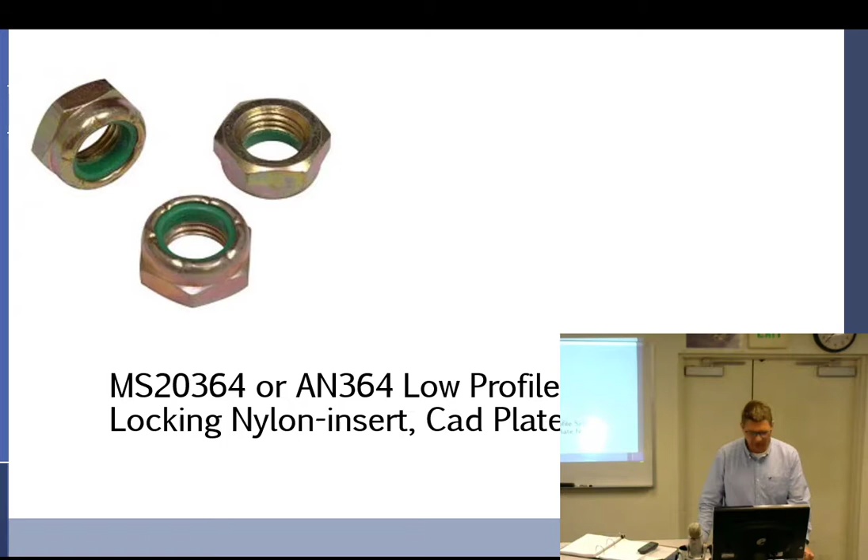Oops, can't see that because my writing is underneath the picture. Got to fix this stuff. All right. Oops. We want that one. Okay. So where did I leave off? Here, we'll do this one.

Okay, so point number 2, MS 20364 and an AN 364 or an NAS 1022 is tension load. No. Shear load, sorry.

Just making sure somebody is paying attention. I want the hard eraser. Why can't this be there? Technical difficulties on this side of the class. Yeah, that's what's throwing me off over there. You guys are all jack wagons.

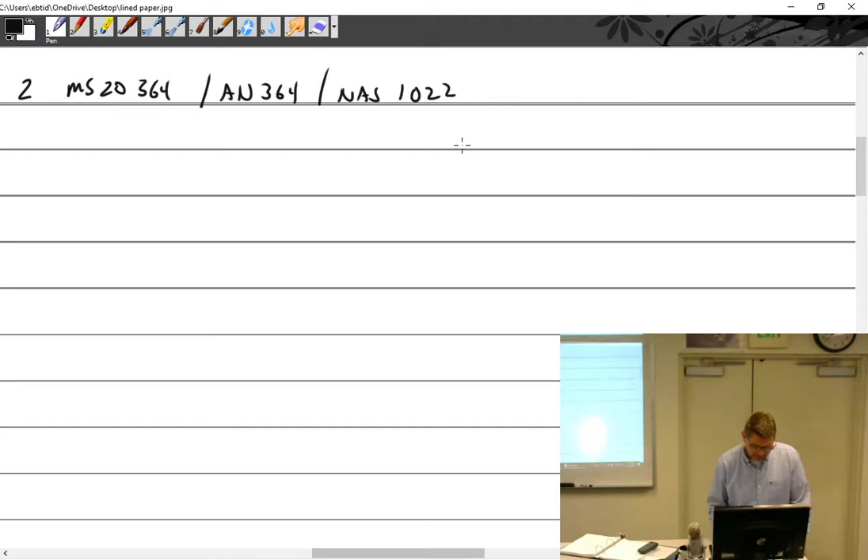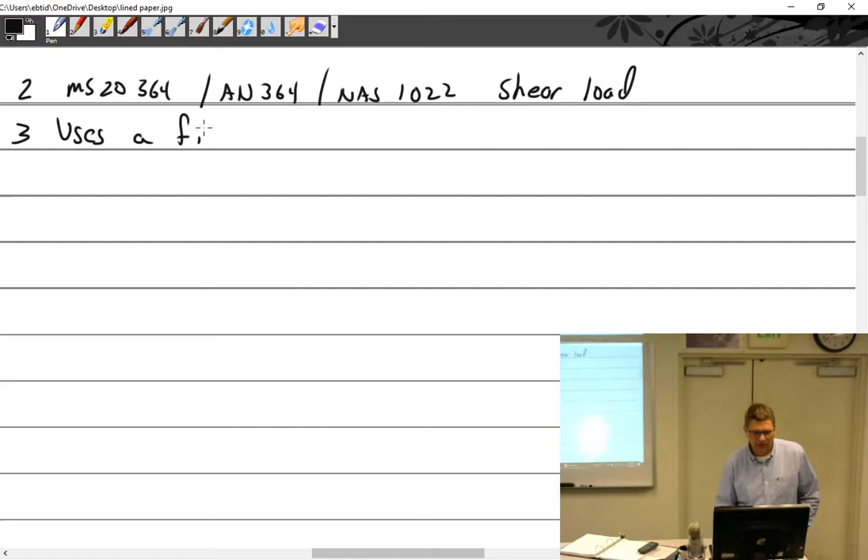All right, is shear load. Shear load. All right, all of them. The 364, 365 uses a fiber or nylon insert that grabs. It's an unthreaded insert. Grabs the bolt. So the nut grabs the bolt and prevents it from turning.

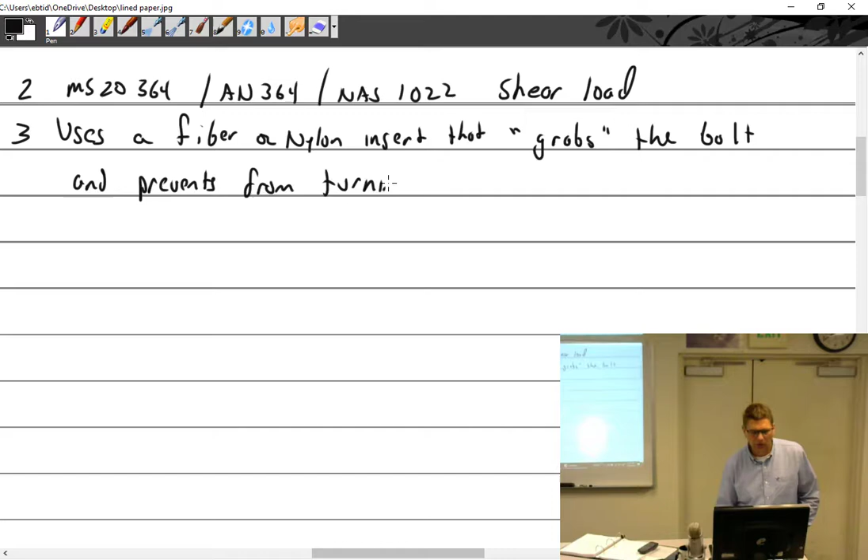Is it reusable? Yes. Possibly. Reusable if the nut has a minimum prevailing torque or application torque, and that torque is found in AC 43.13, chapter 7, page 7-12.

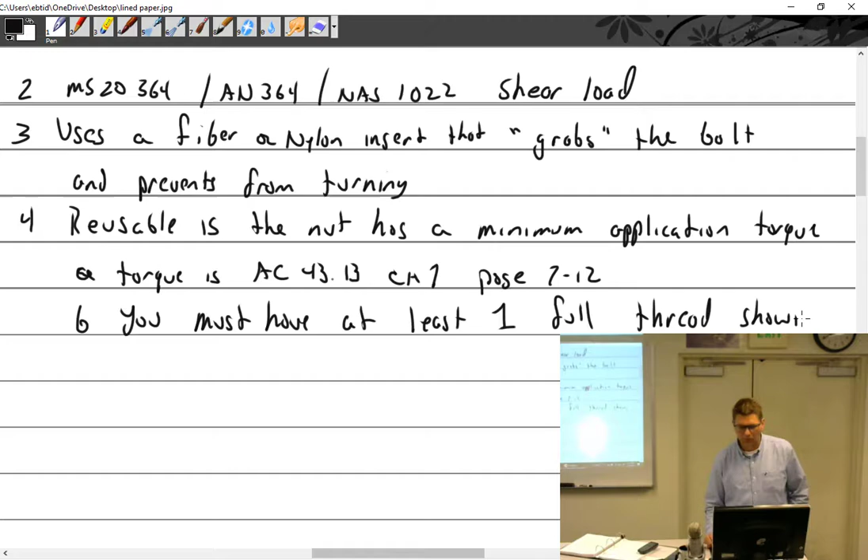Also, this has nothing to do with being reusable, so I don't know why it's here, but anyway, you must have at least one full thread showing past the nylon.

What if you put it all together, torque it down, and it's flush with the nylon? So what do you got to do? Take it off. And what? Use a longer bolt. Use a longer bolt. Or change the washer. You could go to a light washer. Take from a thick to a thin washer.

Yeah. How would anyone know if you reused it? You would know. How would they know? Because if you took it off, it would. You can take it off. That's possible. So like if you had a couple in your hand, how could you tell which ones were being reused and which ones weren't? If you put one on that wasn't up to spec, how would anybody know? You wouldn't. Nobody would know. Yeah, it would look fine. I guess when it fell off, we'd know.

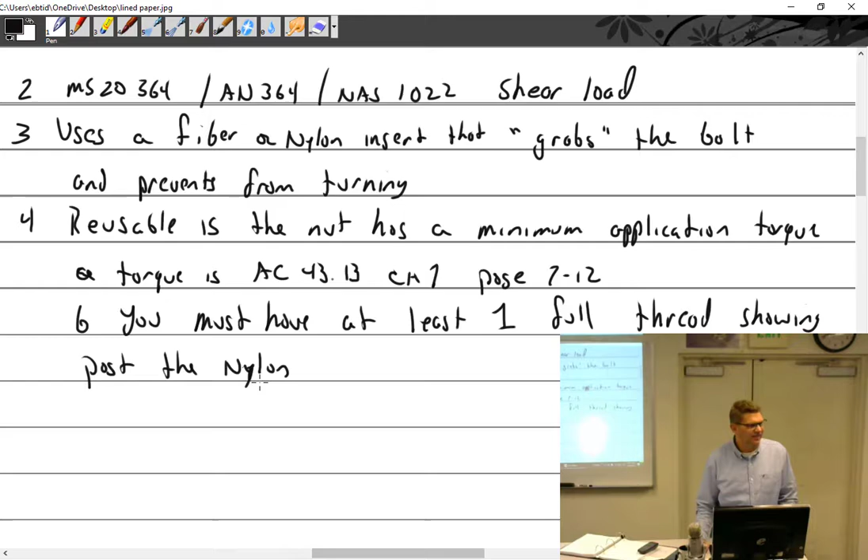But no, quite honestly. So if you take a nut off and you're like, I'm going to reuse the nut, and I really don't want to check prevailing torque, I don't want to deal with all that. It kind of doesn't really go on by my fingers, I need a wrench, or even if it screwed all the way down with my fingers, just torque it. It'll look fine. You would have no idea. Does that answer the question? You're shaking your head like, yeah, that's the way it is.

Now, would you personally ever use a self-locking nut like that? Yeah, sure. It's right there in AC 43.13, tells me I can.

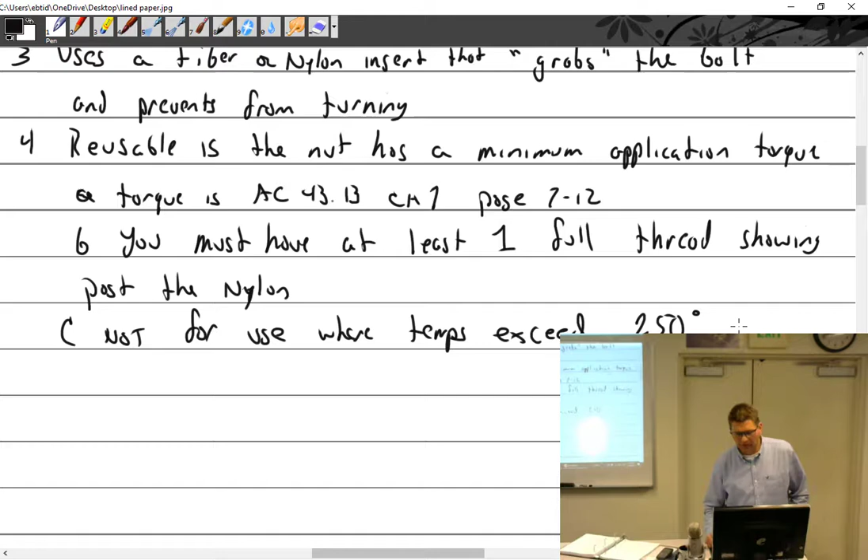Not for use where temps exceed how much? 250 degrees Fahrenheit. And I think I already mentioned this once, not for use where bolt or nut are subject to rotation. All right. What if we have to go over 250 degrees?

All right, so there's our prevailing torques. Here we go. So this is often called the high temp self-locking nut, but it's only good up to 450, not very high temp. So you're building an airplane, which is something I used to do a lot, take it all the way down, put it all back together, use new hardware. Where would I make the distinction between maybe doing this nut or one of these nuts? Location. I mean, what would be a good rule of thumb? Where would I use these nuts?

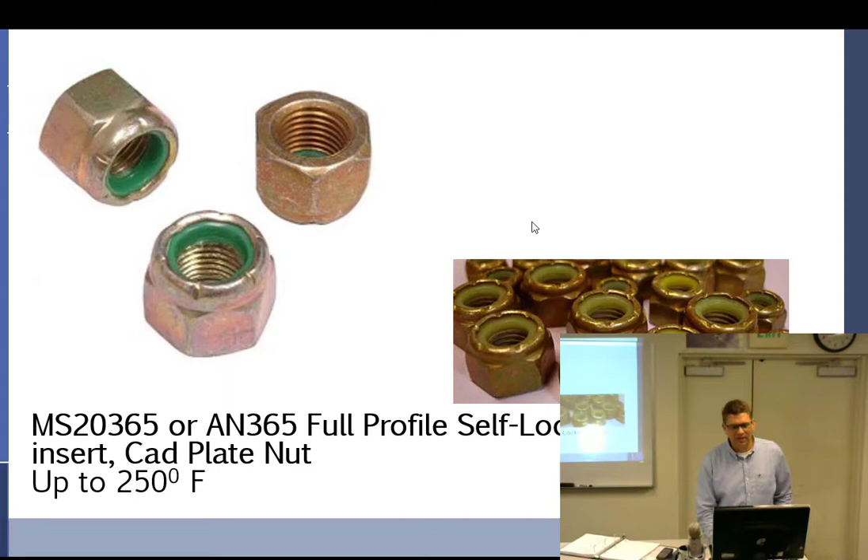The door. Okay, everything behind the firewall should be 250 degrees or less. Where would I use then the low temp, high temp? Forward of the firewall, not everything, forward of the firewall. That was kind of my rule of thumb. So I would use forward of the firewall all this type of nut. Not that everything forward of the firewall reaches that kind of temperature, but it just made good sense to me to do that. That's the MS21045, the AN363.

And along with that, should I have a small shear nut? Say no. Nope, they don't make them. So these just come in the tension, the taller, that I'm aware of. They make different kinds of nuts.

So the way this one works is you can see that they've cut it. Like a little monkey trained to use a hacksaw, he cuts slots in it, and then they put this part in a vise and squeeze it in. So this is actually smaller than what the bolt is. So as the bolt goes through it, it has to spread this part of the nut out, and that grips it really tight. Which also means that these nuts can be a little problematic getting on. They can be pretty tight.

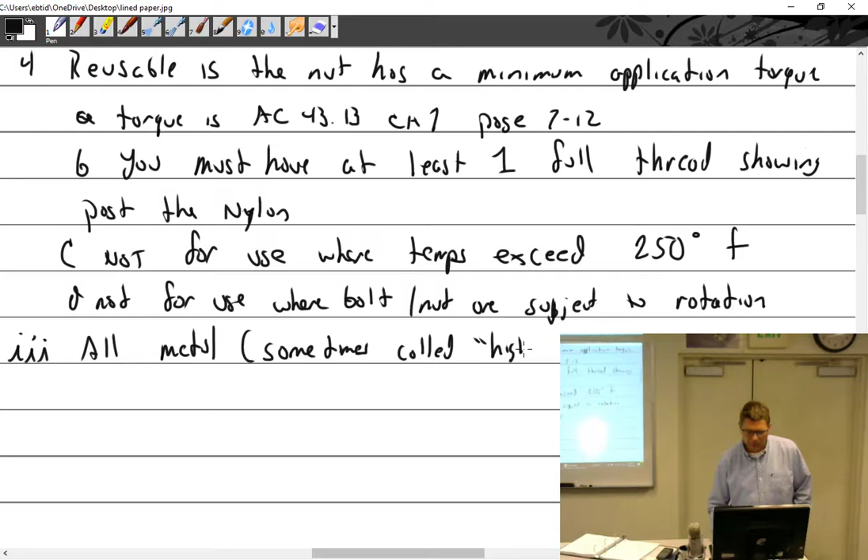I'm going to go minimum prevailing torque. We'll call it all metal. Sometimes called high temp. I got to go up a little bit, high temp. But it's not really high temp because max temp is 450. So could I use this on an exhaust? No. Definitely not. Although I see it done.

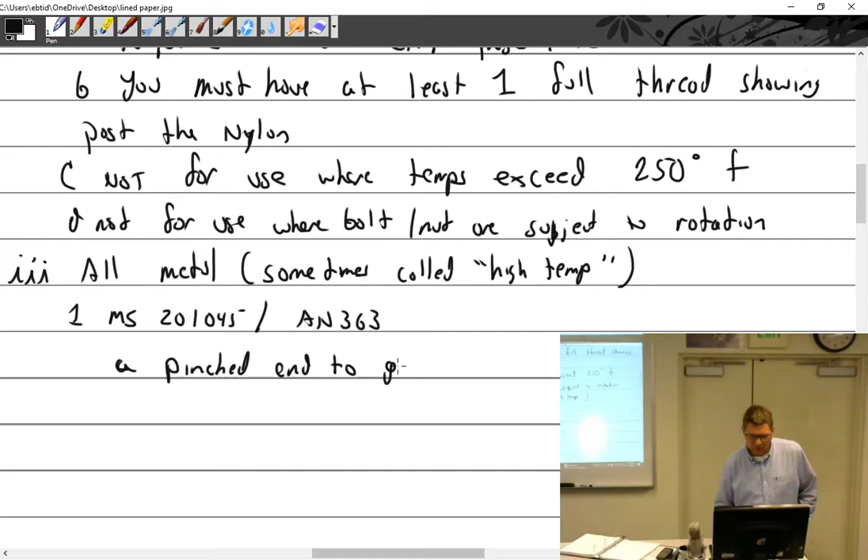All right, so we have the MS21045/AN363. We'll call that the pinched end. A pinched end to grip the bolt. Okay, then we have the MS21046. Again, I don't need you to memorize part numbers. It's just, what else am I going to call it? Uses an out of round end.

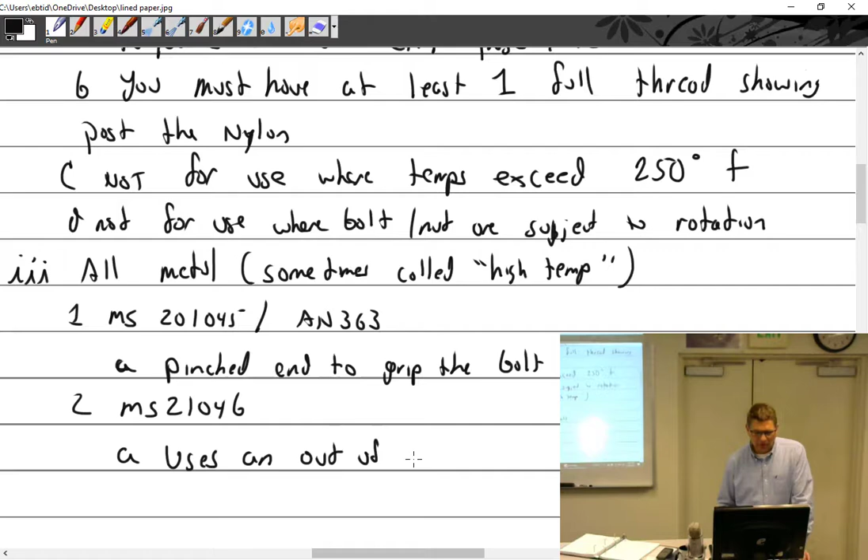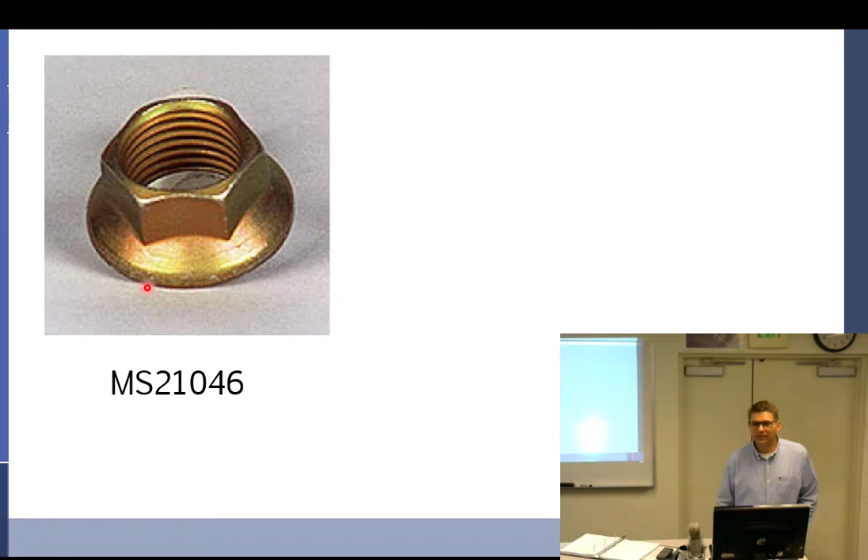There we go. 21046. Yep. So it's actually kind of pinched in here, but it's not quite round, so one side is a little bit smaller than the other. It also uses a reduced size wrench on here. So it's funny, it's a smaller wrench size, but a bigger footprint down here. Would you still call that like a shouldered nut? Yeah, that's not a bad name for it. I can call it shoulder nut.

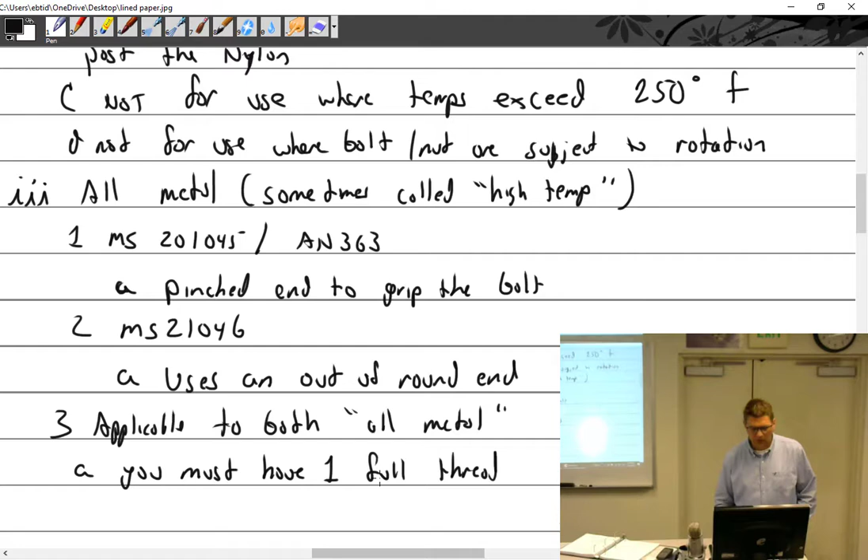Let me see. So, applicable to both nuts, all metal. What about them? You must have one thread showing. Full thread. What else? For use where temps do not exceed 450 degrees Fahrenheit. Well, why?

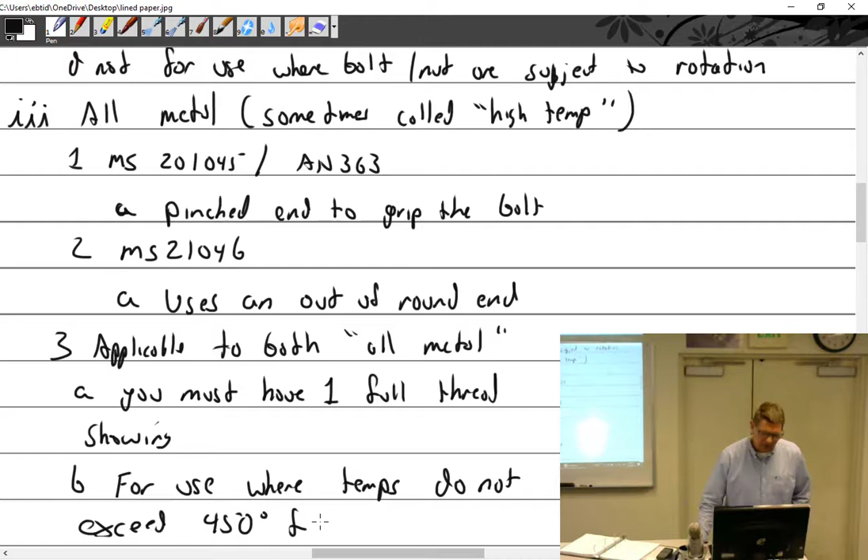Because it would expand and loosen? Ooh, that's good thinking right there. It's not right, but that was good thinking. No, I'm serious. That was good.

Okay. So often I'll see mechanics try and use these two nuts to hold exhausts onto cylinders where the temperature gets much higher than 450 degrees. And what happens is the CAD plating starts baking into the base metal and it becomes extremely brittle. To the point where I've often tried to take them off and the nut will crumble in my socket. It comes right off. Easy off.

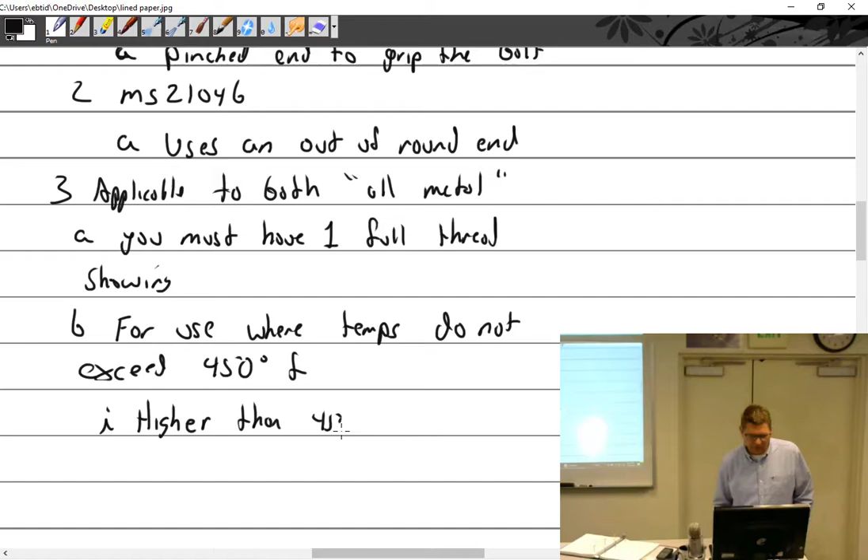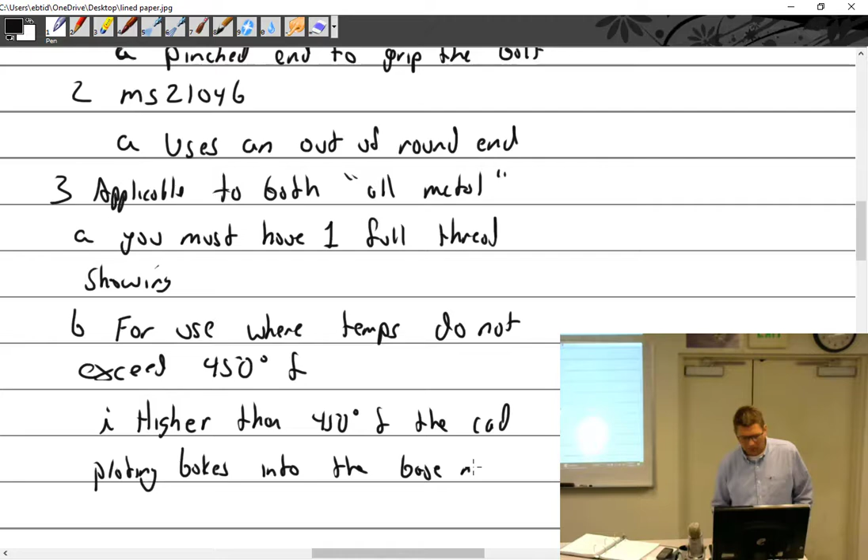Higher than 450 degrees, the CAD plating bakes into the base metal, and nut becomes brittle. It's like peanut brittle, but it's nut brittle. And not for use where subject to rotation.

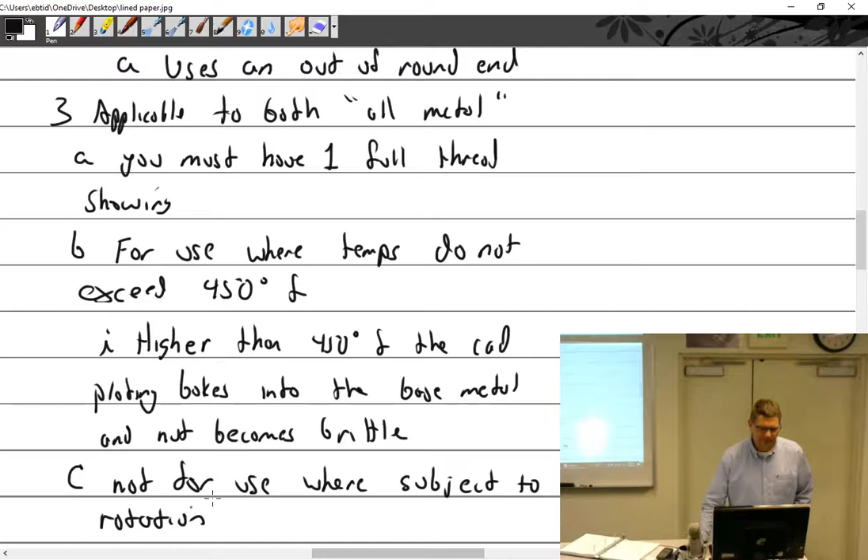How far can I go up here? I'll just keep going until somebody starts crying. Okay. All right there then.

Non-ferrous? Oh, not asking me. And let me see, do I have the... Now, Lycoming uses corrosion resistant stuff, lock washers and stuff, so that's what you get there. So high temp nut, I'll just put this: where temps exceed 450 degrees. We can just leave it at that.

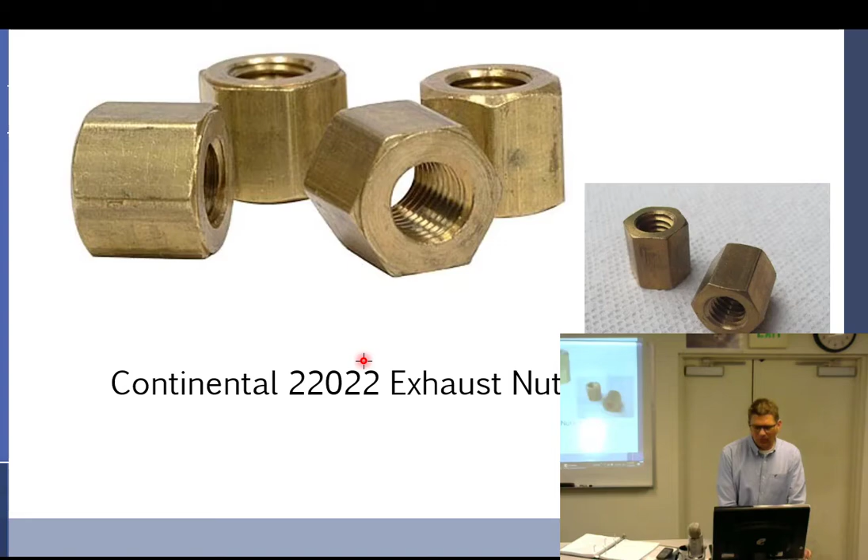C for castellated. Castellated nuts. Okay, an AN365 was the tall self-locking. Then the AN364 was the shorter one. And wouldn't it be nice if castellated nuts did the same thing? But no, the taller one is an AN310, and the shorter one is the AN320, backwards.

So if you look at that 320, there are not a lot of threads in there. There's about 1.5 down here. These things strip out super easy. So you have to use the low end torque, or you'll find out why. What's next? Oh, I remember that one. Okay, so when you use these, there are many ways to install a cotter pin. There's only two right ways.

Tim sent me a great picture today. It looked like they basically tied it in a knot on this side. Well, that's wonderful too. This is the preferred way, where it comes through, and you bring it over the top of the stud and then it's cut. So don't let it come over and down and around over here. And the other one is bent down around a flat of the nut. That is the proper way. The alternate way is to rotate this 90 degrees and bend each side around that way. It is acceptable.

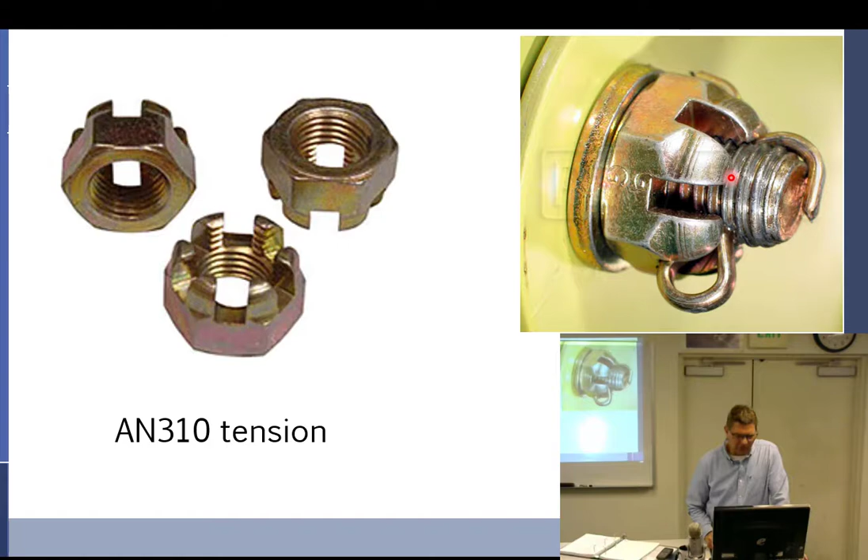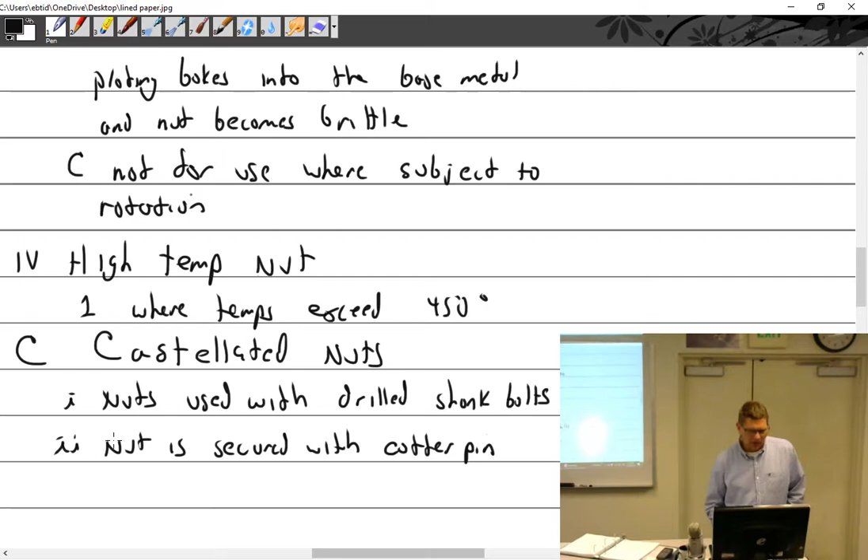All right, castellated nuts. What do I do? All right. Nuts used with drilled shank bolts. Nut is secured with cotter pin, sometimes safety wire.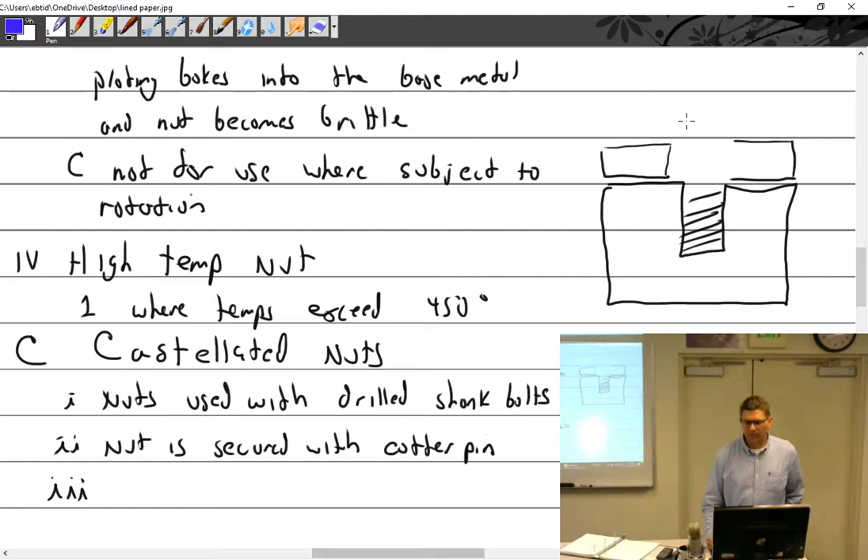All right, so if I have an item that I'm bolting something to, so there's one item, and here's the other item I'm bolting to the top of that one. And so this has threads. What kind of hole is that now? Blind hole, okay. And so the manufacturer decides they're going to put a stud in here. So here's my stud. Comes out. Got the threads on it. But they've drilled a hole. What goes here?

Okay. So first I'm going to add a washer. Then I'm going to put my castellated nut on. Oops, good luck here. Castellated nut. Good enough. There's my castellated nut. And I put a, what here? Cotter pin? Yeah. Put a cotter pin, and it comes in, it folds around one way or another. Bad drawing, whatever. All right, am I good? Got a castellated nut, got a cotter pin. What's going to stop the shank from coming out?

Right. So I take a wrench, and I put it on this nut, and I back it out. What do I end up pulling out? So now what do I have? Basically just a bolt that was never safetied to begin with. Everybody follow? You cannot use a cotter pin in this situation because the entire thing just comes out. And so what you end up with is a stud in your hand, a stud and a washer and a castellated nut, and there's my cotter pin. Now, the nice thing is you don't have to change the cotter pin. You just put it right back in, right?

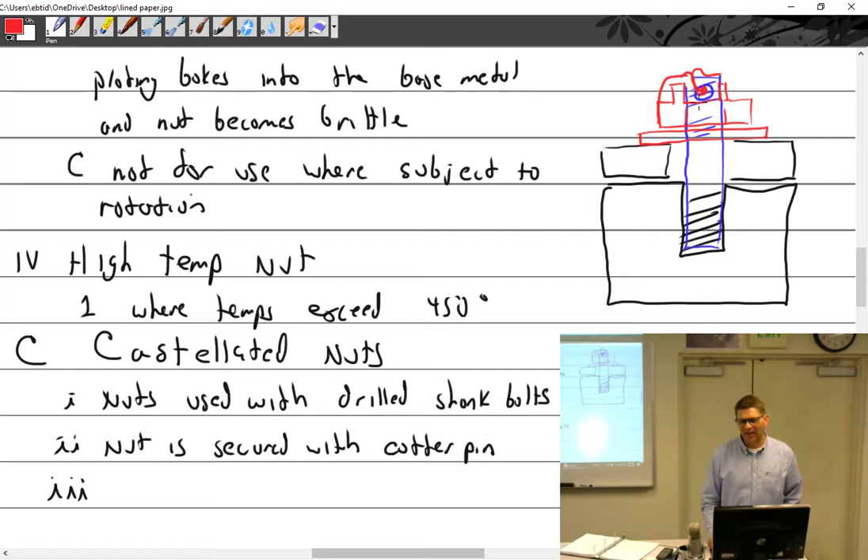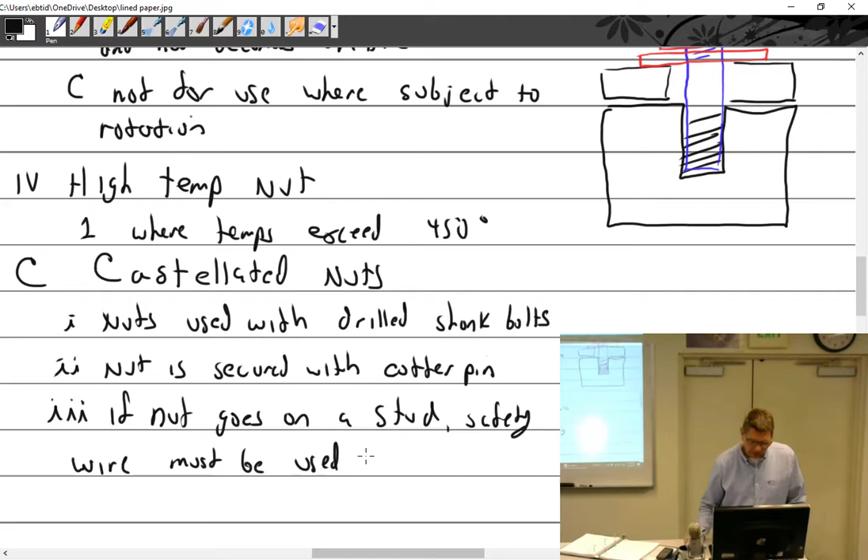Okay, so this does not work. You cannot put a cotter pin here. You must use safety wire. So that holds the stud in. Or cross-thread it. So if a nut goes on a stud, this is called a stud here, not a bolt, a stud, safety wire must be used. Otherwise, you just made a bolt, is all you made, with a removable head.

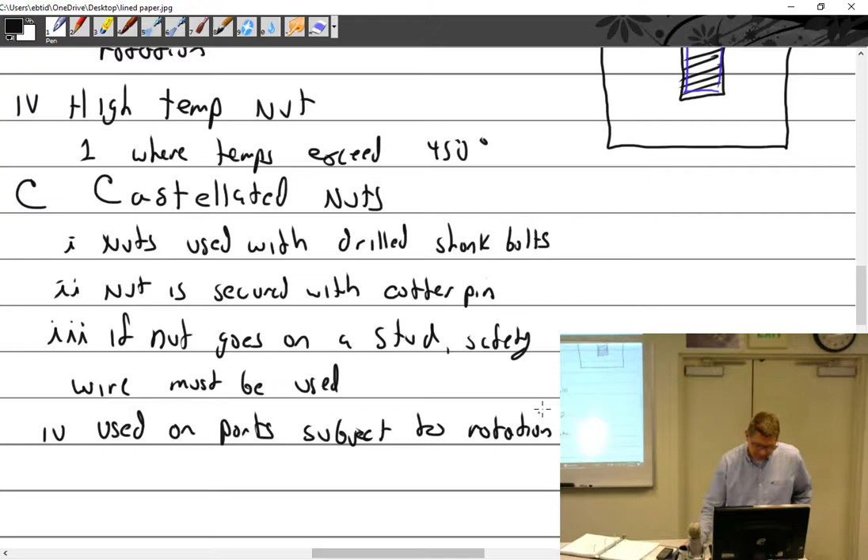Where would I use a castellated nut versus a self-locking? There you go. So I'm going to use it on parts subject to rotation, such as, not the wheel halves, but the actual wheel holding onto the axle has one big nut, and it's always castellated and has a cotter pin going through there. If I have a conrod, no, a conrod's not really subject to rotation. Connecting rods had cotter pins, but all new engines don't. They found that was just a disaster.

So clevis bolts used in shear load. They often hold control cables onto something, so the control cable has to give a little bit of movement, or it goes through a bell crank, so you don't want to squish down the end of the control. I'm talking about aileron controls, elevator controls. You want movement between those things. So you put the pin in, you put the nut on, it's barely finger tight, and run the cotter pin through. So there are a lot of times you don't even torque these things.

Part subject to rotation. You guys are awful with the phones tonight, man. You are going to lose it when you get into Larry's class and have to write essays.

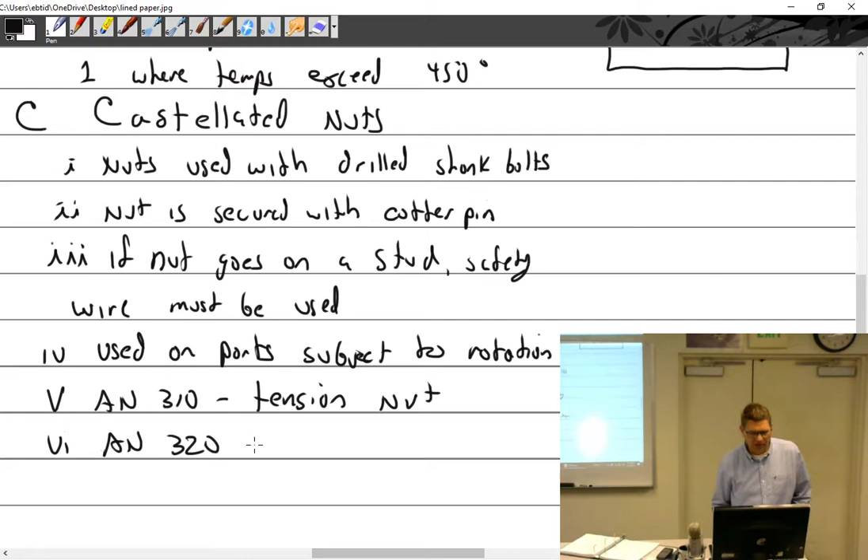So that's the tension nut, and the AN320 is the shear nut.

All right, that brings me to plain nuts, but not that kind of plain nut. Plain nuts. You guys are plain nuts.

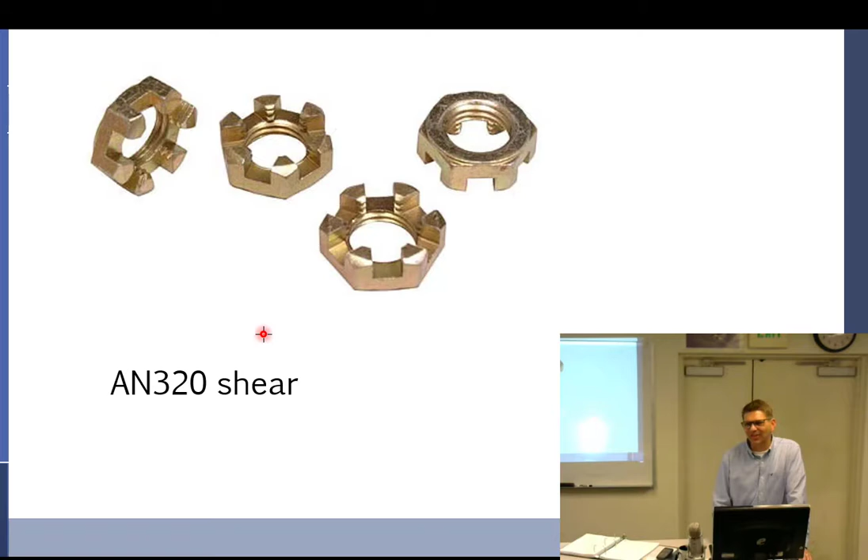Right. Oh, so I already saw that one, but I had a class one time, and the guy said, "Well, that's great. Why don't they make self-locking castellated nuts?" And we all laughed until I looked it up. That's an MS17825 Nyloc castle. When you absolutely positively don't trust the guy putting the cotter pin in, I don't know, but it's a real nut. Why would you do both? I can't answer that question. Double safety. That's right. So there we go, the Nyloc castle.

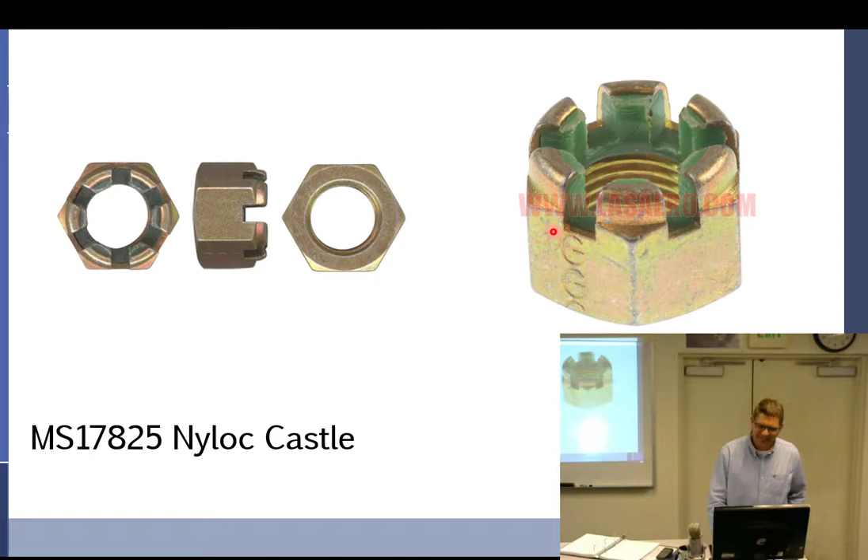All right, plain nuts. You have the AN. Did I get that right? I think that was the other way around. 310 is the tension, and the 320 is the shear.

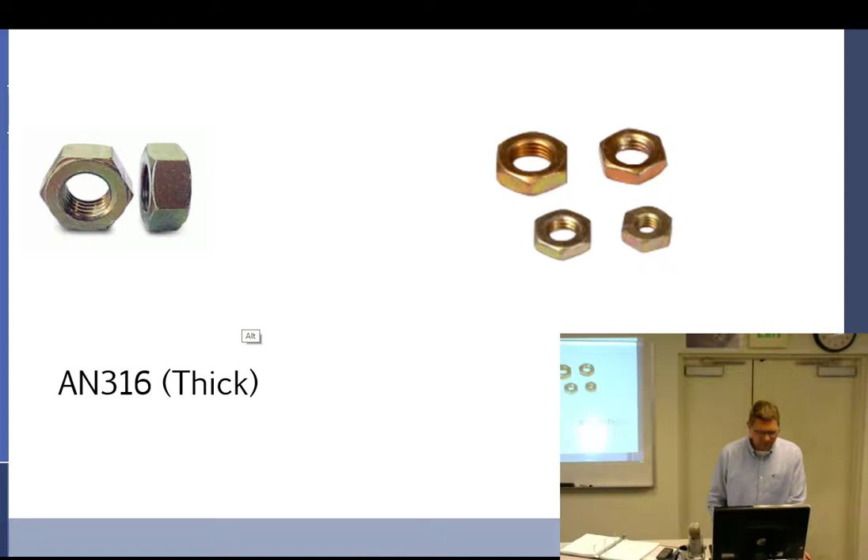So, plain nuts. Whenever you use a plain nut, what keeps the nut? So I've got this a lot today. People put a plain nut, and so how are they going to safety it? Well, they drill the head. How does it keep the nut from falling off? Safety the head. Okay, plain nuts must be used with a lock washer, or pal nut. You don't see that happen a lot, but could be.

And 316 is the tension. The 315 is the shear. No. I knew that didn't look right. That's why I said somebody look that up. I did think it was backwards. Thanks. 315, 316. I knew it was wrong.

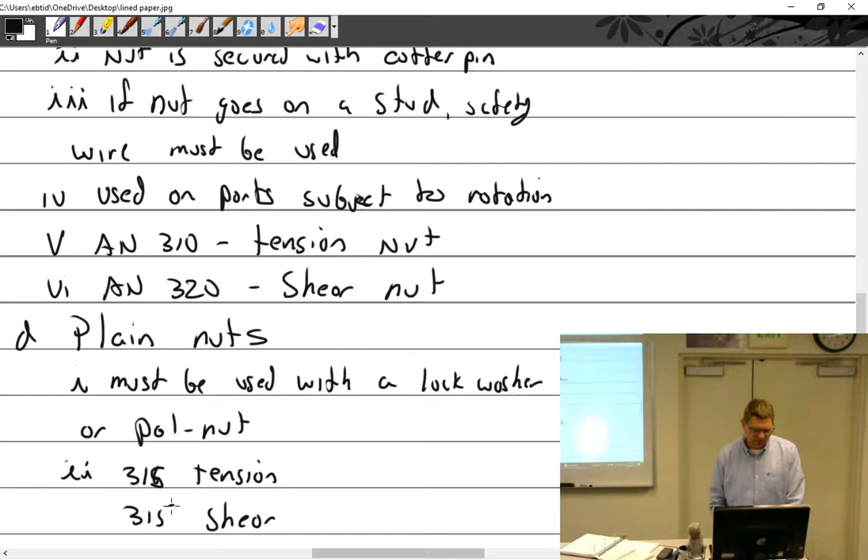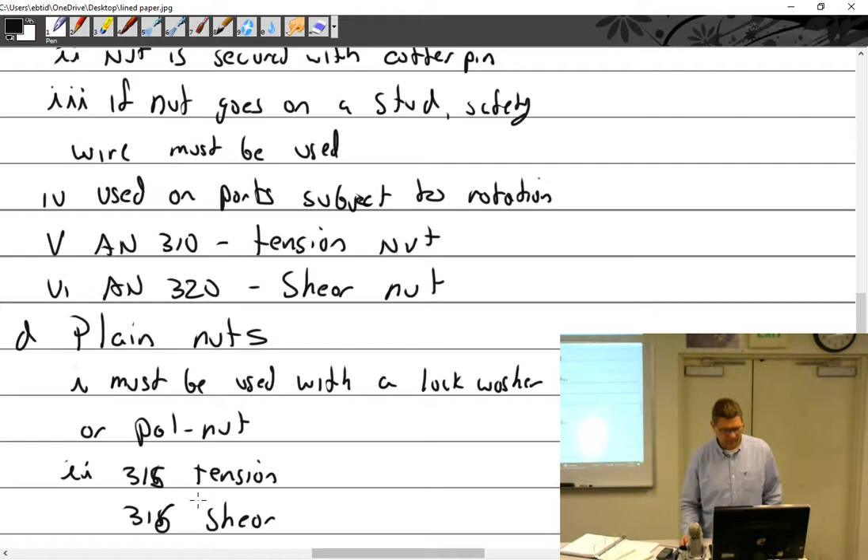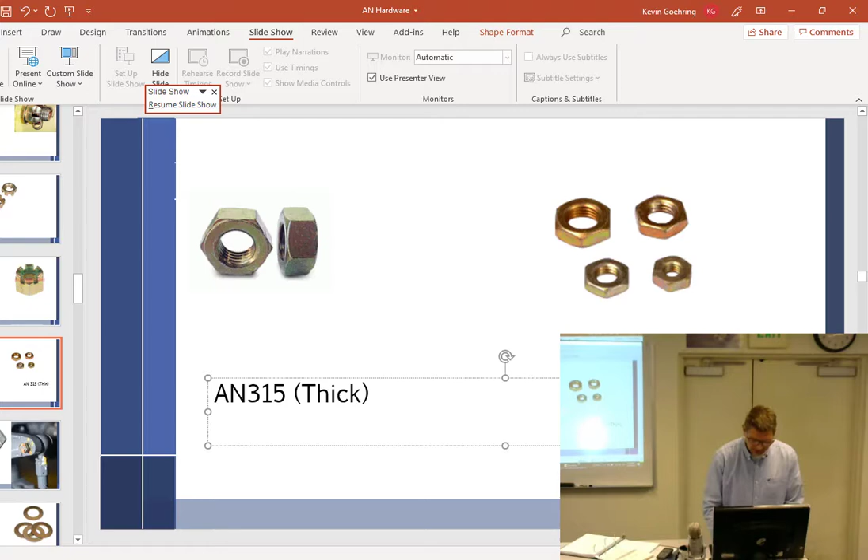Yes. I know. Yes, there was a disclaimer. I'm not to be held responsible for anything I do or say. He's a professional. And I'll just edit this part out, so you won't see this anywhere else. You edit your video? No, that's the joke. I don't actually. I know. Jeez. See what kind of problems you guys cause me? We didn't cause the problem. You cause these problems. It was better when I just drew pictures.

Okay. 315 is tension, 316 is the shear. All better. Okay, so you got to use some sort of lock nut or pal nut. What's pal nut? It's like a double nut. Exactly right. So a double nut is when you would take like a 315 and you want to lock it, take another 315 and turn it against it. Those two, in theory, don't come apart. But while I'm talking about that, a lot of people install studs that way. You put a nut, jam another, what you call jam nut at that point. You're not supposed to do that in aviation because it causes stress at that point.

But a pal nut, I should have a picture of a pal nut. There's a pal nut. They're just thinly stamped nuts that it's hard to believe they actually work because if you tighten them too much, they just strip out. They're not reusable. And again, they're just thinly stamped steel, and that is supposed to keep you alive. Where would you find that? You'd find it in this application right here. It's poorly torque striped. Torque stripe is a lacquer paste that indicates if there's been rotation on something. Different colors.

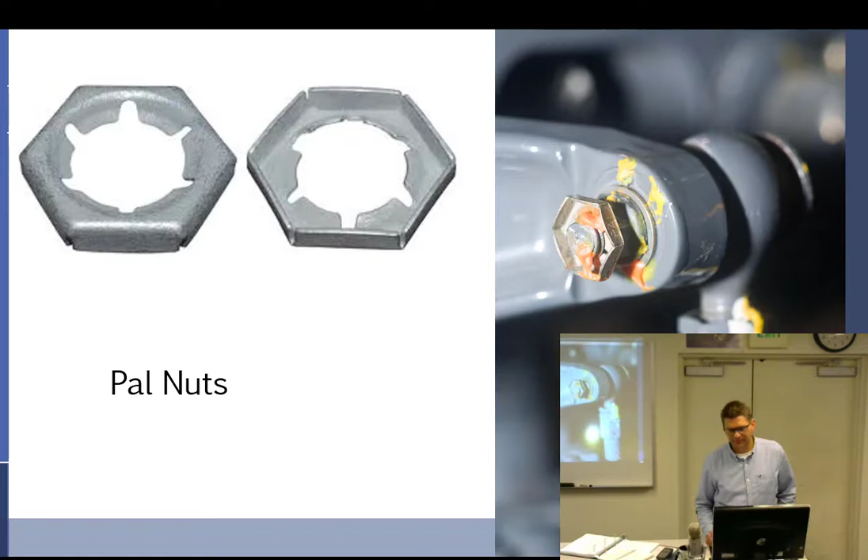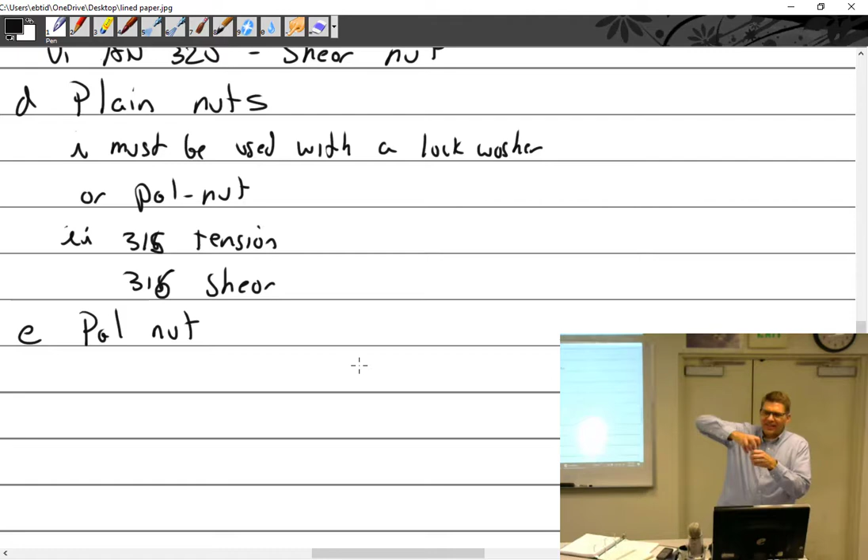PAL, what? So PAL nut is a jam nut. Oh, okay. So you have one nut, you tighten this against the other nut, so they fight each other and don't unscrew, in theory. Just enough where it doesn't strip. Yes, just tight enough where it doesn't strip. They have a one-time use, and acts as a jam nut. Jam nut.

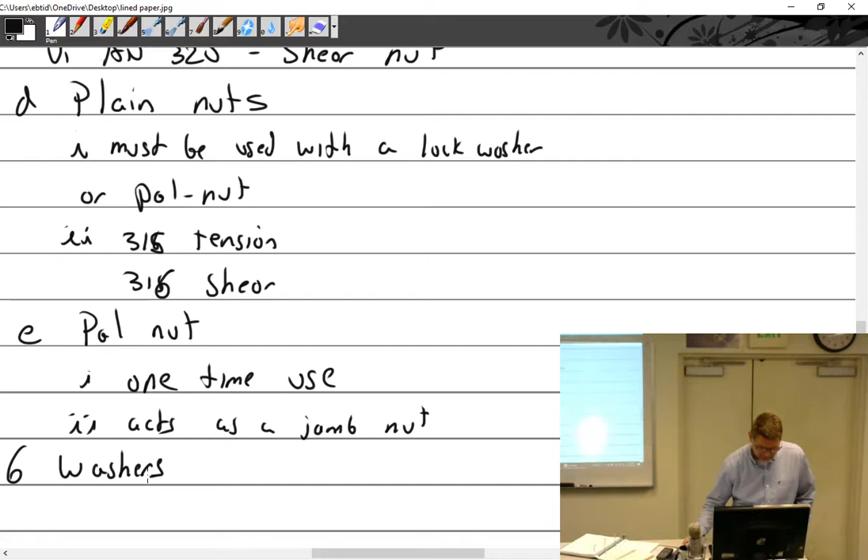All right, washers. The thing about washers is where you use them. Washers are almost always flat. Yes. No, actually, almost used under a nut or bolt. You almost always put it under the bolt head and under the nuts. You almost always use two. Under a nut or bolt to protect the part from being damaged.

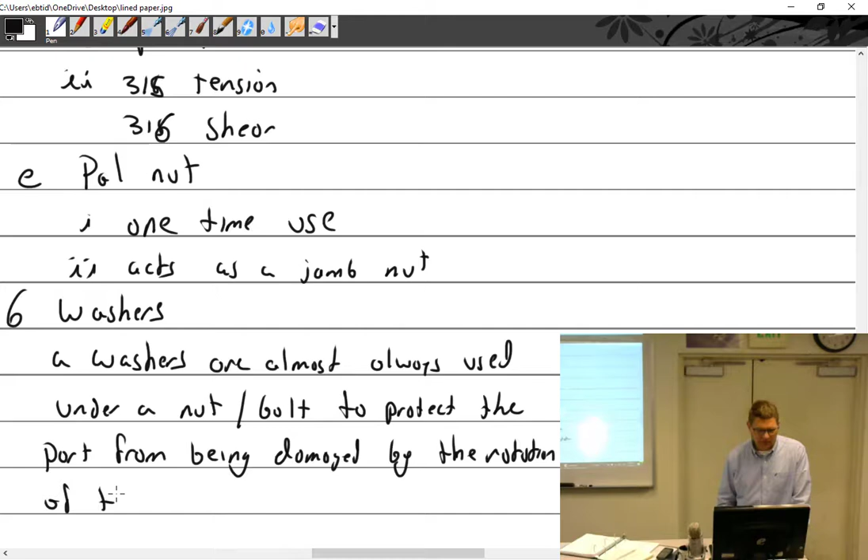By the rotation of the nut or bolt. So it's there to protect the part. So make sure you use it. What is the exception to that? Okay, exception is like cylinder-based nuts. I said that already. Steel on steel. All right.

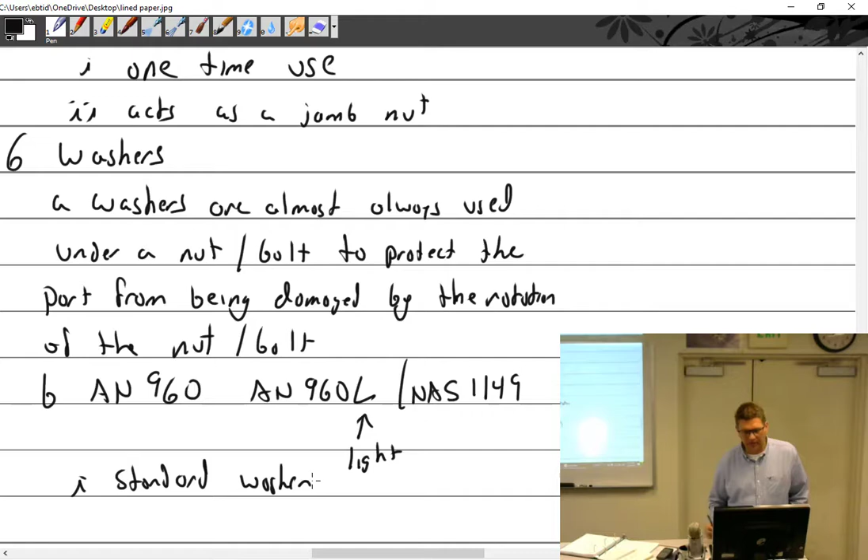I know it as the AN 960 and AN 960L. L for light. Means it's thinner. But that number was changed to NAS 1149. That is the standard washer. Yeah, but then don't you have to put a letter and then... Yep, then it gets all crazy. Standard washer. And that's all I'm going to say about that.

All right, standard washer, standard thickness, heavy CAD plated flat washer, or the half thickness, light CAD plated steel washer. And how do you know the difference if you have them in your hand? Well, if you have one of each, you'll know. And once you get used to them, you'll know.

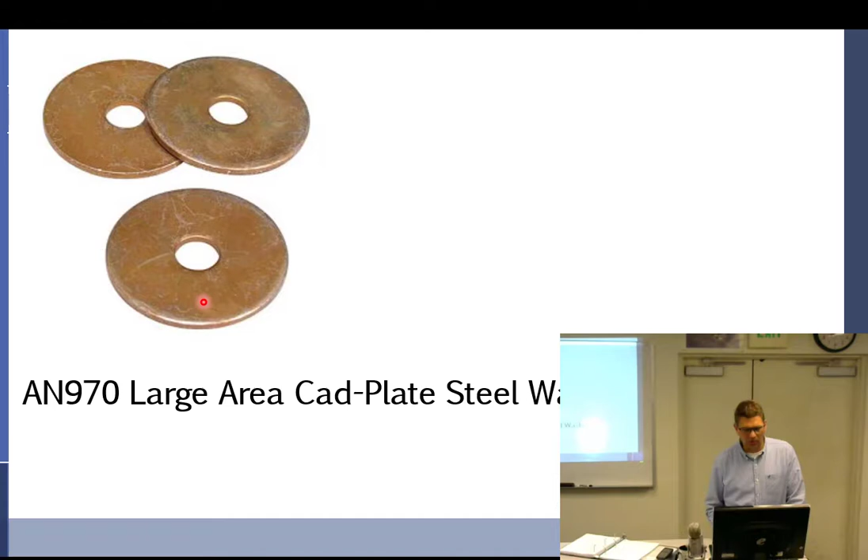And there's that one, and the AN 970, which is what I said was on the other end of that ball joint. It's just a large area washer. If you're in automotive, you'd call it a fender washer. Don't know. Standard washer, and then we have the AN 970 large area washer.

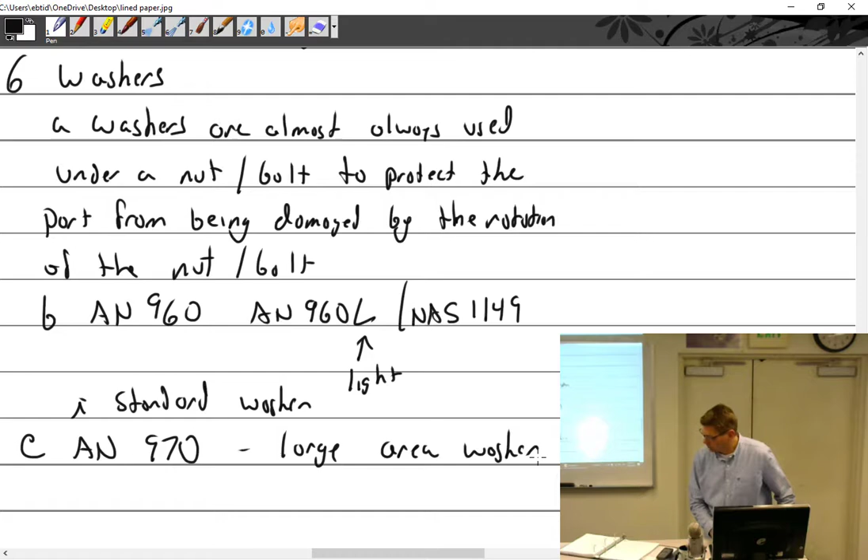And that brings me to lock washers. Lock washers. All right, so what kind of lock washers do we have? Yay, okay. We have...

And what happens, thought I had a diagram. What did I do? Let me see what I got here. It's still on the website. It's all on the website. Oh, I thought I had a decent depiction of how they worked. I do not. I do. Yeah, I got a lot of stuff to do.

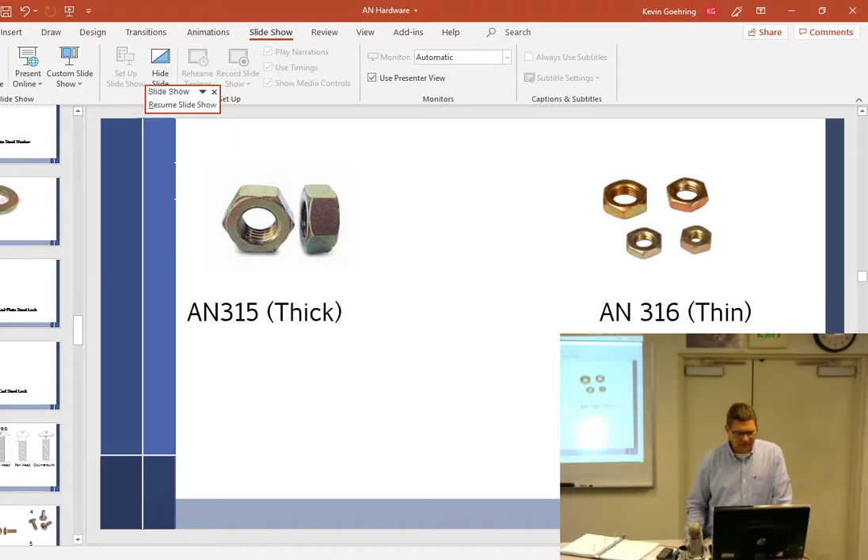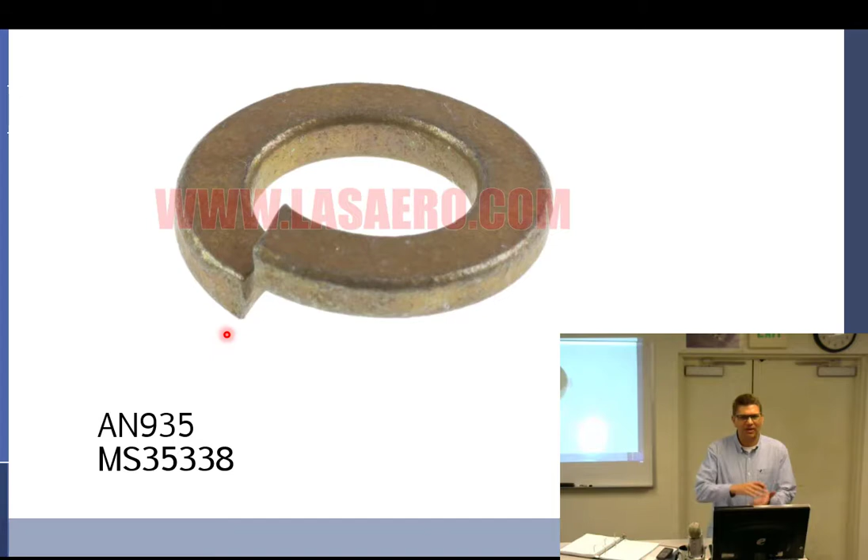Well, all right. So you can reuse these as long as they're still split. So what happens, and it seems kind of odd, is you have a washer down below and a nut on top, and as the nut starts to back out, this will dig into the nut, and this is going to dig into the washer, and you think, well, what keeps the flat washer from coming with everything? Don't know what to tell you.

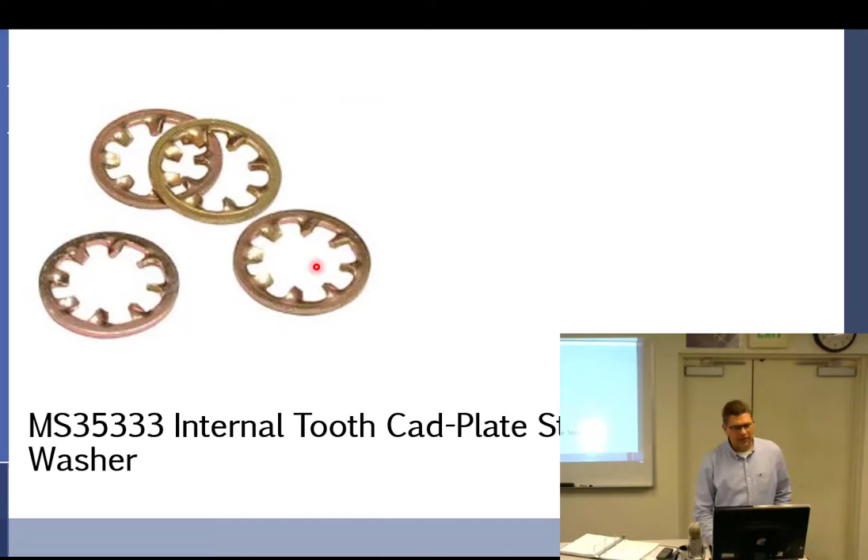All right, reusable. Not reusable. These are not reusable. So this is the small internal, I call them star locks. So internal tooth star lock, not reusable. And external tooth star lock, not reusable.

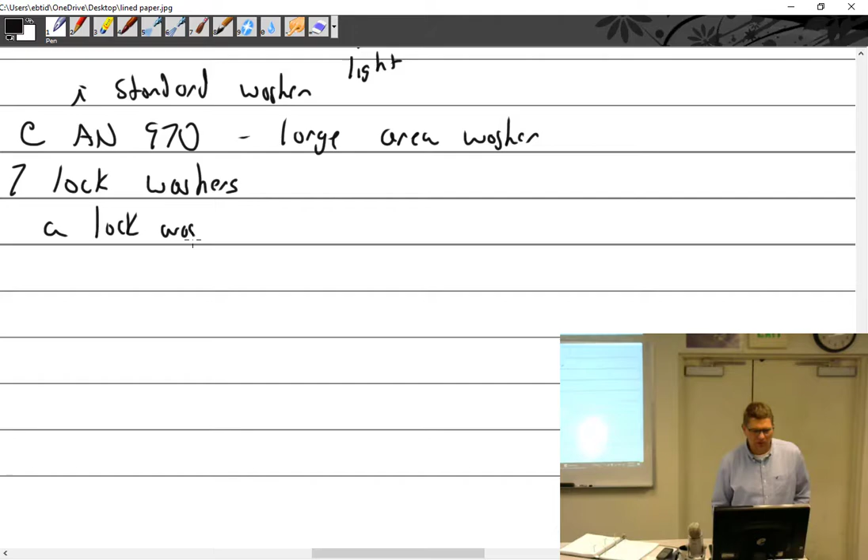So lock washers. We have the lock washer. Lock washer goes between the washer and the what? Nut. Washer and nut. Not the bolt head. Not between the expensive aluminum part and the flat washer. So it's washer, lock washer, nut.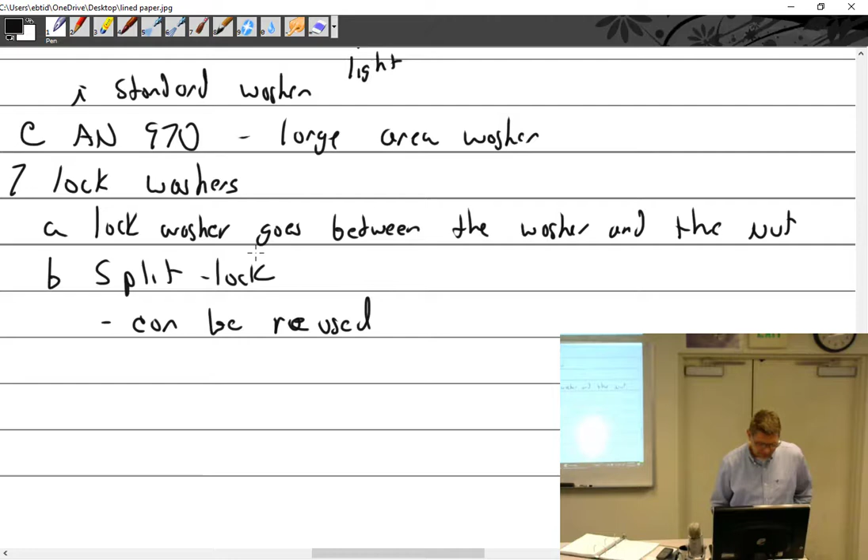Okay, the split lock can be reused. Can be reused if they are not flat when removed. And then the star lock. Not reusable. Not reusable.

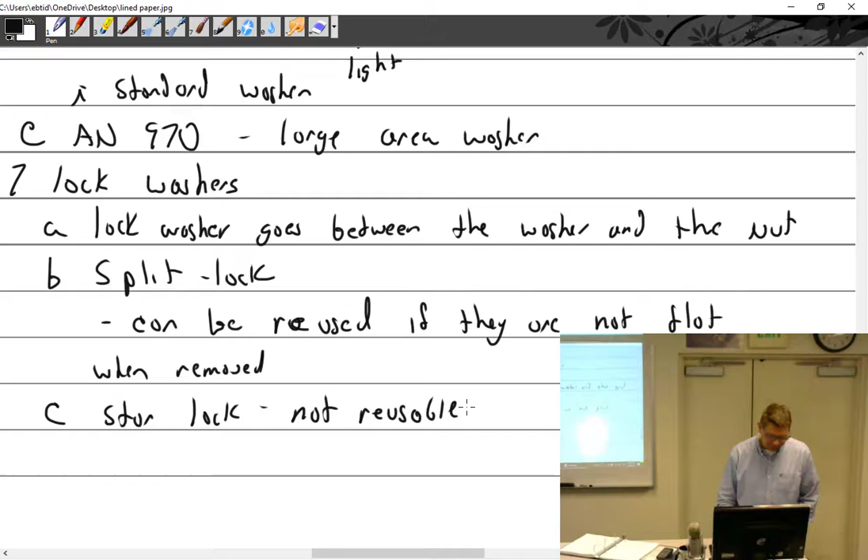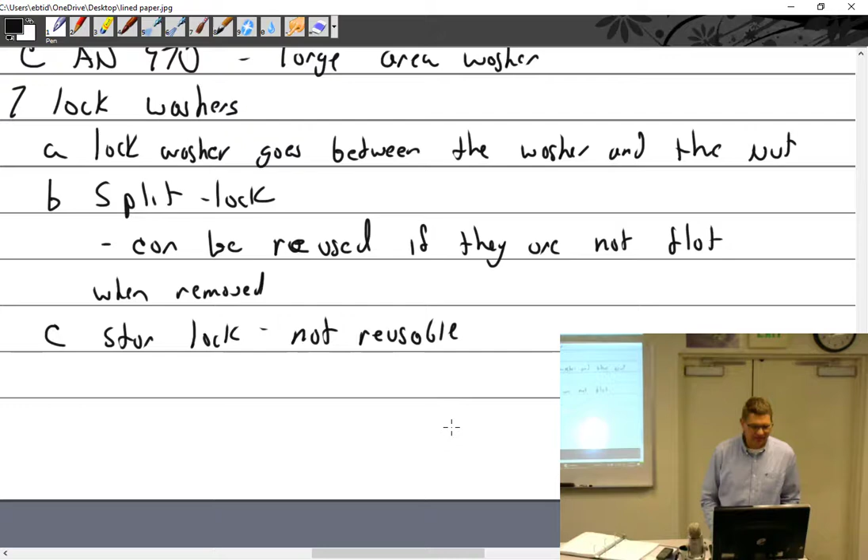What if you have left-hand threads? That's pretty rare, but they're marked in some way. I said that the other day. So you can't use that split washer then, right? Oh, yeah, you actually, well, the star, yeah, you still can. That's a good question. All right, let's see.

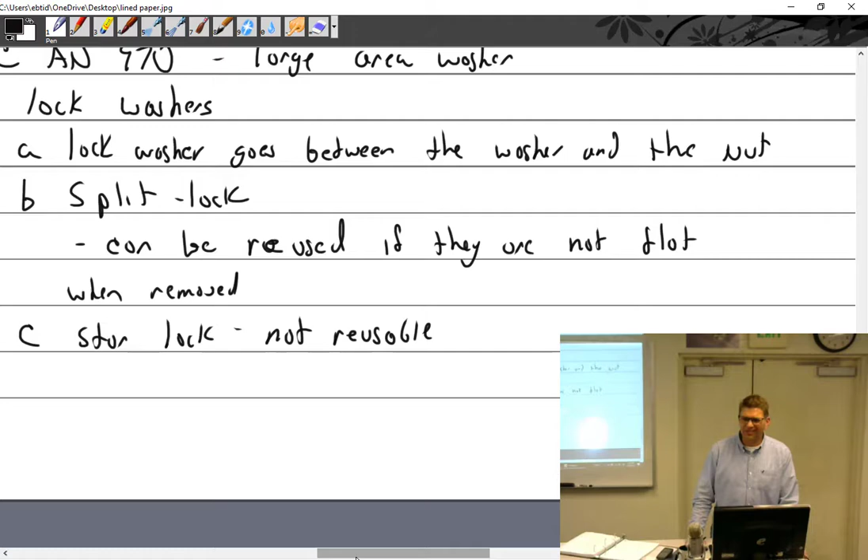But if it's left-hand thread, it's going to be some special application. The rotation will tighten it, and it's usually cotter pinned. If it's left-hand thread, it's because it is subject to rotation, so it most likely has a castellated type nut or some other sort of locking device.

The only time I've seen left-hand thread is on lug nuts. What's that? On a box truck. On lug nuts. Yeah, so I was thinking lug nut, but that's on a car, not an airplane. All right, so we got lock washers.

Talk about screws. Maybe I can make this kind of quick. Screws, oh man, it can get kind of crazy. Fillister head, washer head, truss head, pan head, countersunk. Of course, you can't see that because it's, what's that?

He said if I was a screw, I'd be a pan. Good, glad about that.

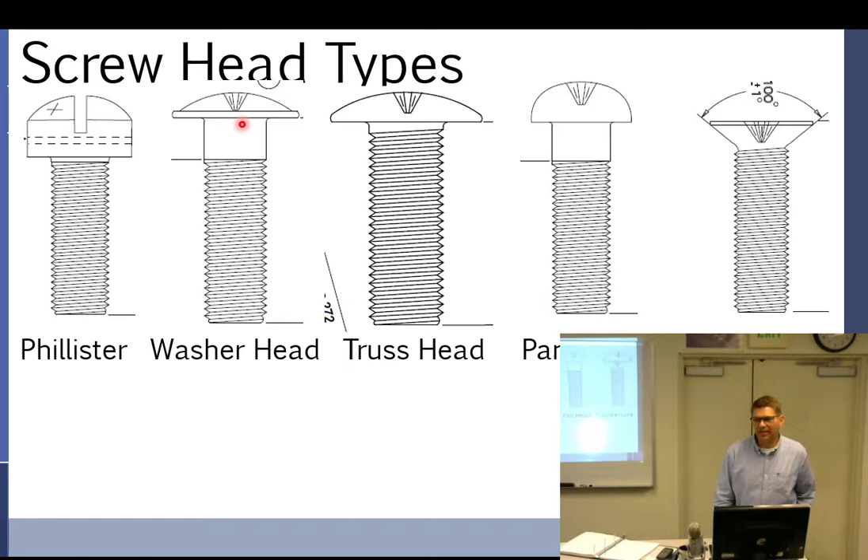So you understand the difference between countersunk and the other type. For the most part, screws are not structural. This is the exception. Usually your washer head is a structural type screw, but the other ones are not. Let me see what I have to say about that. You're supposed to match this to that, but you can't really see it because I'm covering it, sorry about that.

So what is number 1? What kind of head is that? A what? Let's see, does it do line by line? It does it all at once. Sorry. All right. So fillister, washer head, pan head, truss head, countersunk. Not structural, definitely not structural, possibly, and yes.

I threw this up here because there's such a thing called Reed and Prince, and it looks exactly like it. A Phillips screwdriver has about 30-degree flukes and a blunt end, while the Reed and Prince has 45-degree flukes and a sharper, pointier end. This makes a better weapon.

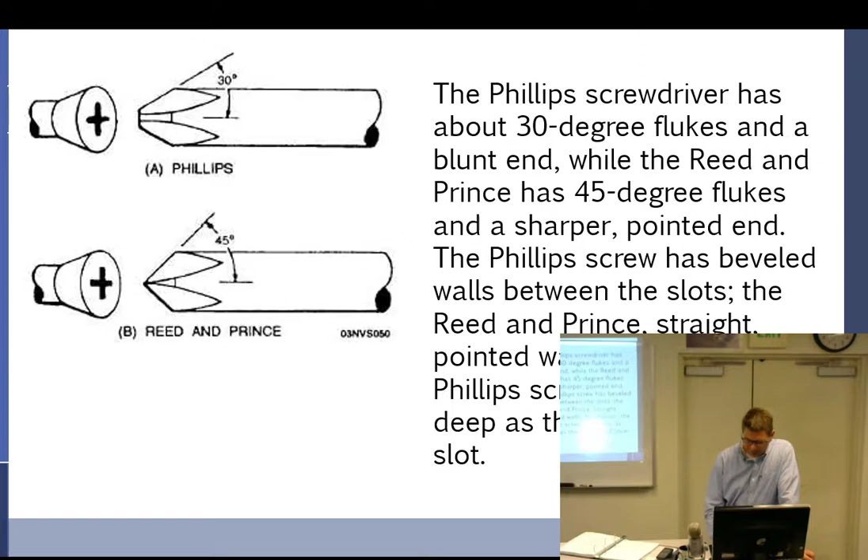The Phillips screw has beveled walls between the slots. The Reed and Prince has straight pointed walls. In addition, the Phillips screw slot is not as deep as a Reed and Prince. Guess what I'm going to call it? Phillips. Can I ask James for a screwdriver? The proper terminology would be slotted, Torx, Torq-set, and tri-wing.

Oh, you're not familiar with Torx? Oh yeah, I was gonna say, wait, you work for Chevy, you got to know Torx. I think they were the first ones in the automotive industry to start using them, actually. Oh, they've been out there forever. Germans used it first for their head bolts.

Is it still considered a Torq-set if it has a little hole in the screw? Oh, the little, yeah, I don't know. Tamper-proof. Yeah, tamper-proof Torx. Again, your common types: slotted or standard, Phillips, Allen, Torx, Robertson square.

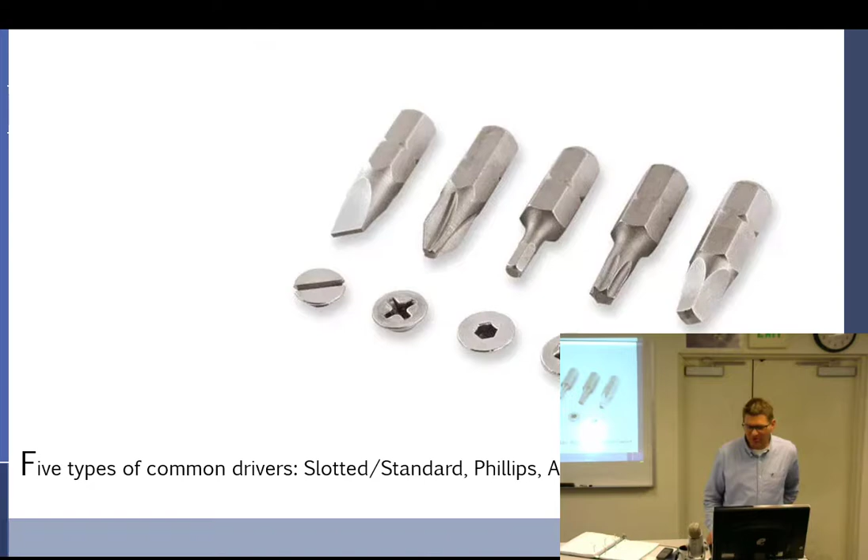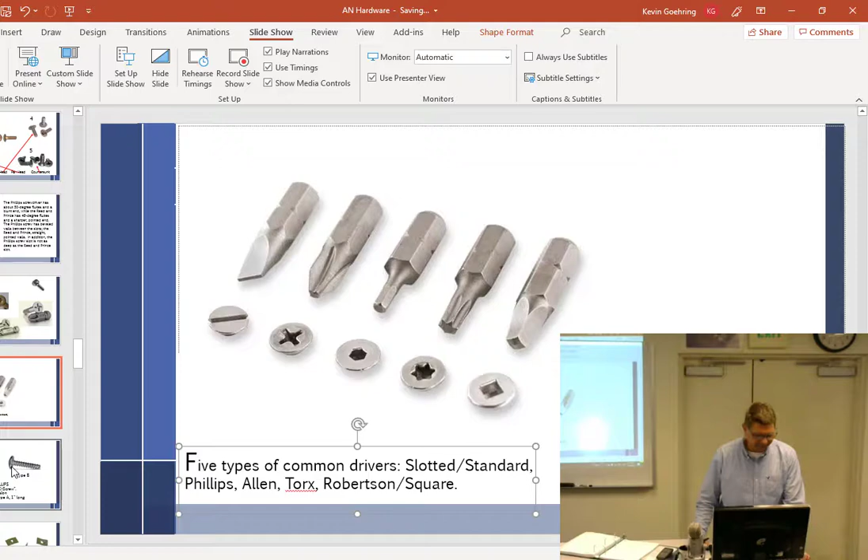Oops. There, now bring it over here. I gotta fix everything. All right. Okay, let me go back.

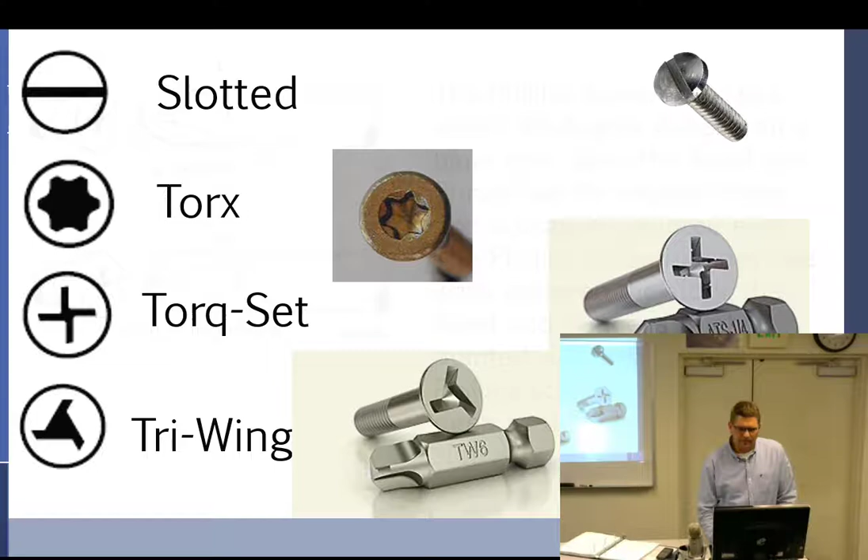Okay, so these type of screws, 1, 2, 3, and 4, these are machine screws. They have machine thread, which is going to work with a standard nut of the right size. And screws come in like number 4, 6, 8, and 10. 10 is also 3/16.

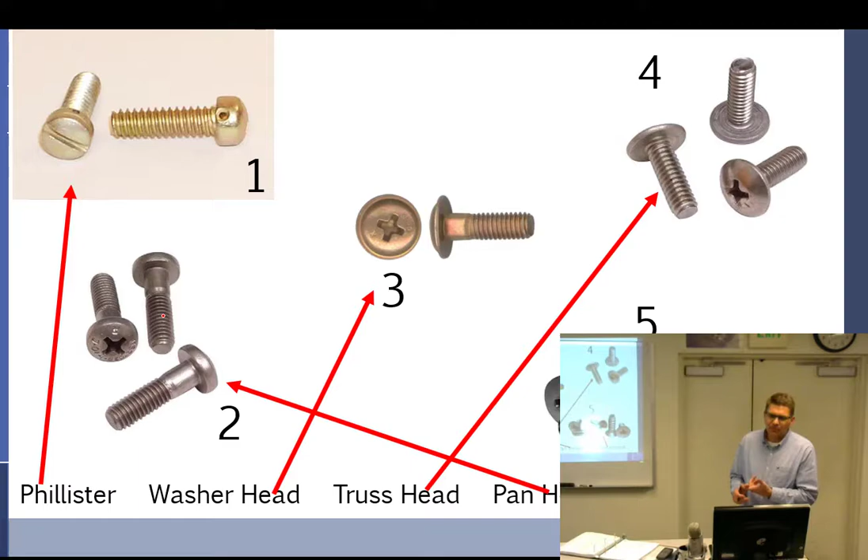But these are not machine screws. These are what I would have called in automotive a sheet metal screw. In aviation, they're called a PK screw, which stands for Parker Kalon. I guess they're the ones that invented it. Huh? Yeah, PK. I've been waiting for this for a year and a half now. It's a PK screw.

These are not machine screws, which means you do not try and force it into machine threads. Out in the field, I see this nonstop and it drives me crazy. When you pull inspection panels off, like a Cessna or any airplane, some are the PK style that go into what's called a Tinnerman nut, and some are threaded, which go into a nut plate. I see them get mixed up constantly. People force these into regular nuts and back and forth.